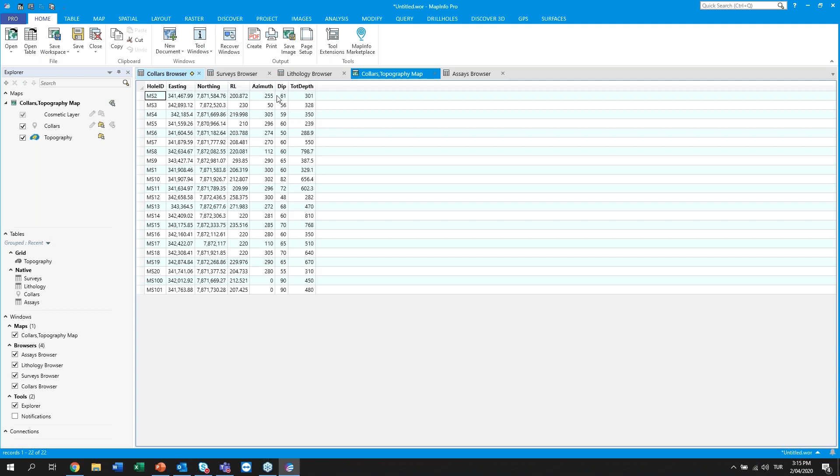I have assay, collar, lithology, and survey, and also topography. I'm gonna open up those. Let's start with the collar. As you can see, I have a table actually prepared for the collar data. You can see that we have a hole ID, names of the drill holes, easting and northing for the coordinates, and also RL refers to the elevation. And also we have azimuth and dip values and the total depth.

For the survey file, we have hole ID again to match our database. Depth values. In some cases, you can face with the at, as it can be written as at, and also azimuth and dip measurements. For the lithology file, we have from-to values. We have intervals and also geological units. And in the assay file, we have again intervals and also the grade values coming from the laboratory analysis.

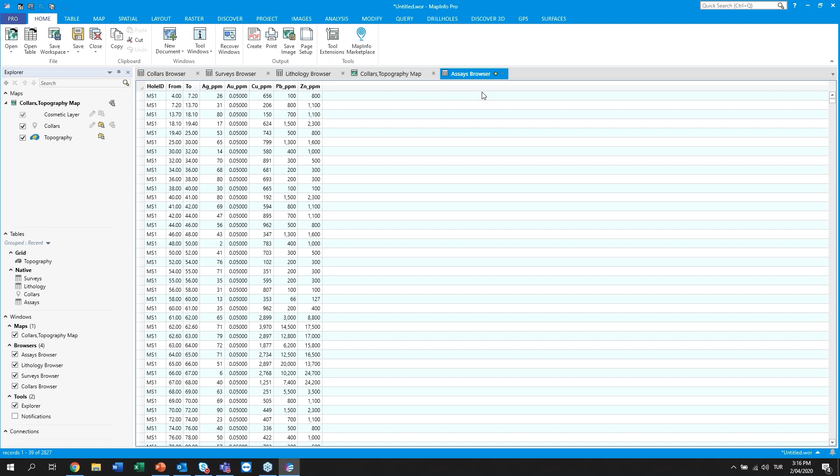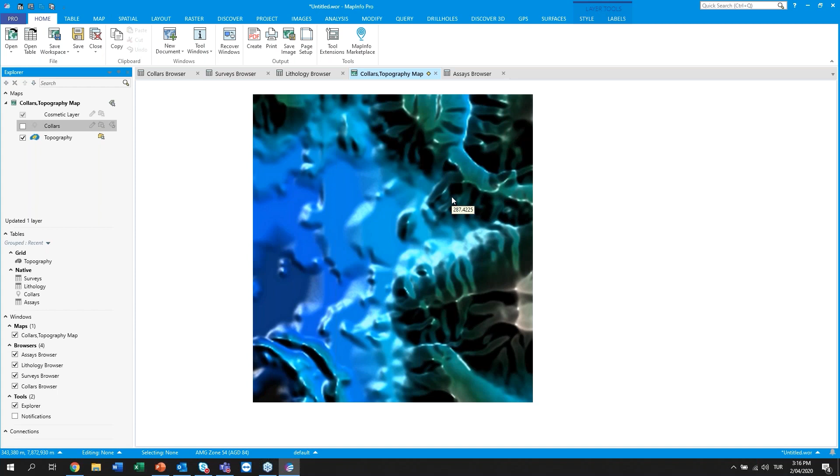Let me close the visibility of collar points. I have the topography. As I mentioned before, we're gonna work on the 2D Discover for this webinar. But if you are working with a 3D tool, it can be visualized as a 3D feature. I'm gonna open up also section lines. If you have section lines similar to this one, you can directly use them. Otherwise, the software will let you produce new section lines if you don't have them at this stage.

Let's come to the drill holes menu. You can find the whole tools, whole commands related with the drill holes. Open, import, create new drill hole project, and also validation commands, legends, sections. You can find all tools related with the drill holes under the drill holes menu. If you have previously created projects for your drill holes, you can directly open them, or you can import previously created projects. Now we're gonna create a new project.

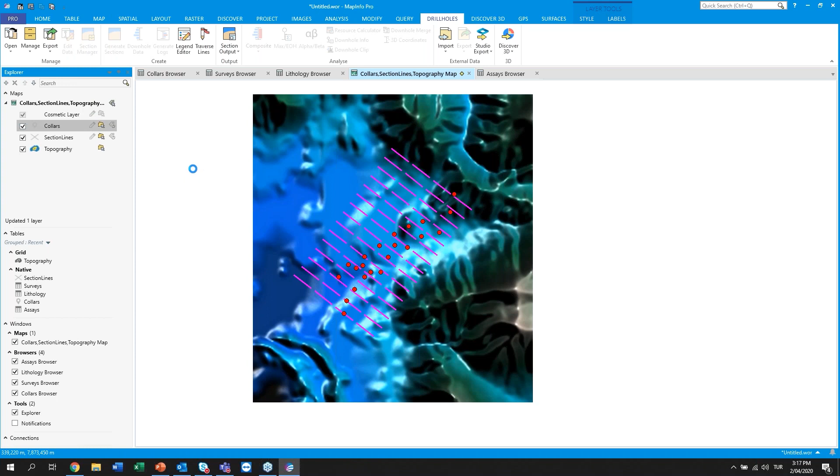I click on the new project button. Drillhole project setup wizard will be open. Now we should give a name for our project. Let's say webinar underscore drill holes. You can give a description to easily track your studies. And also we should define the file path to save this drillhole project. My measurements, depth values or length values, are all in metric values. So I should select the meter.

And also for the project type, we have three alternatives. First one is the project will contain only drill holes, or the project can contain only trench data. The last option is project contains drill holes and/or trench. So we can create a project that includes the combination of both drill holes and trench. Now I only have the drill hole values, so my project will only contain the drill hole data.

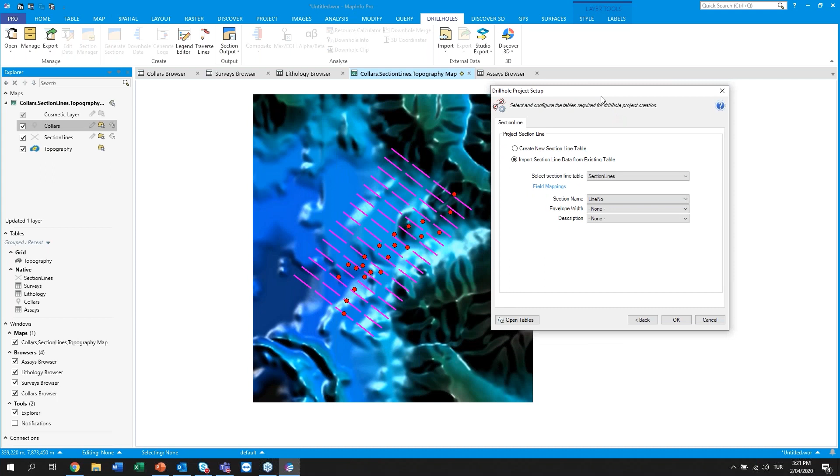Let's continue. I have a topography surface. I select my topography file. If you have any other file for the surface drape or the contour files, you can add them into the project. Let's continue. At this point, if you don't have any section line, you can create a new section line table, or here, as you can see in the pink color, I have section lines. I have a section line table, so I will import them. When I click OK, the software will automatically create our drillhole project according to the input files, the collar, survey, lithology, and assay files.

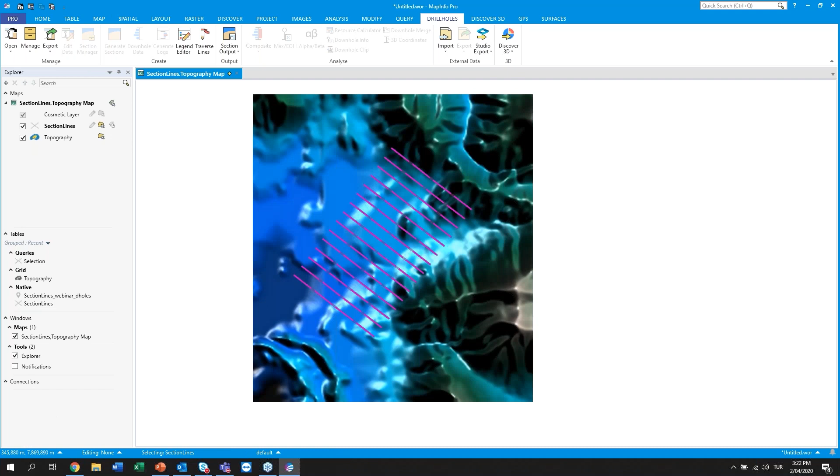Now, as you can see, Discover created a new map window called webinar_dholes, which is the same name I have given to the project name.

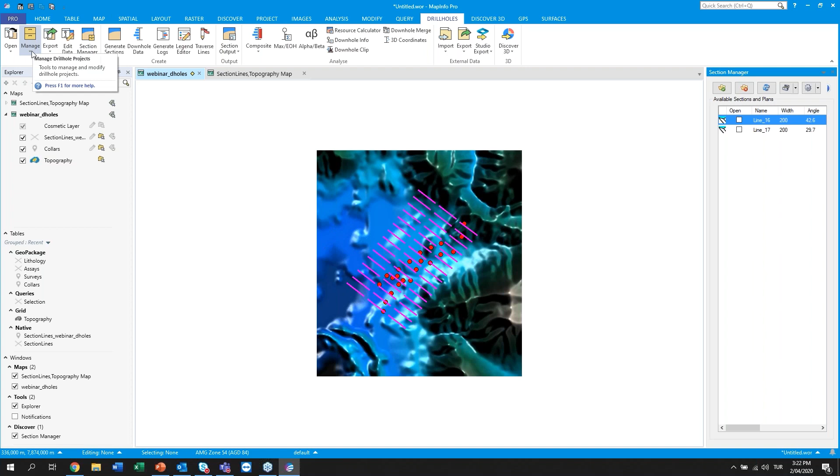And before going forward, let's validate our data. From Manage, you can select Validate. It detects the collars, surveys, assays, and lithology files, and validation will be done for those files. Click OK. Now, some are default validation parameters, but you can add some more. It depends on your project's specifications.

When I click next, collar, as you can see, passed. For the survey, let's also check the collar mismatch. We have two errors, two possible errors. Definitions are no survey records for both of them. So for MS100 and MS101, I don't have any survey records. I should check them. I mean, if I was working for a mining company, I should check them. But in this case, I will assume that those two are not inclined drill holes.

And also, let's have a look at the downhole data. As you know, I have two downhole tables. The first one is assay, and the second one is lithology. At some parts we don't have downhole records for some drill holes. 3 of them don't have assay files, and 2 of them don't have lithology logs. Let's continue as it is, and when I click OK, it will recreate the drill hole project.

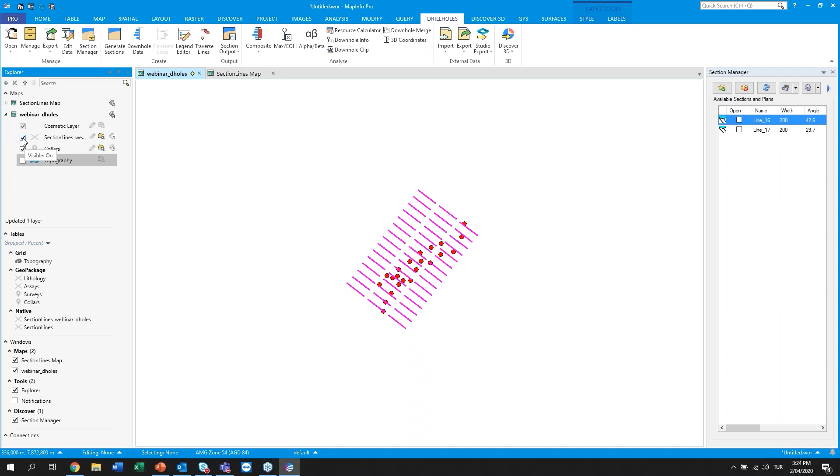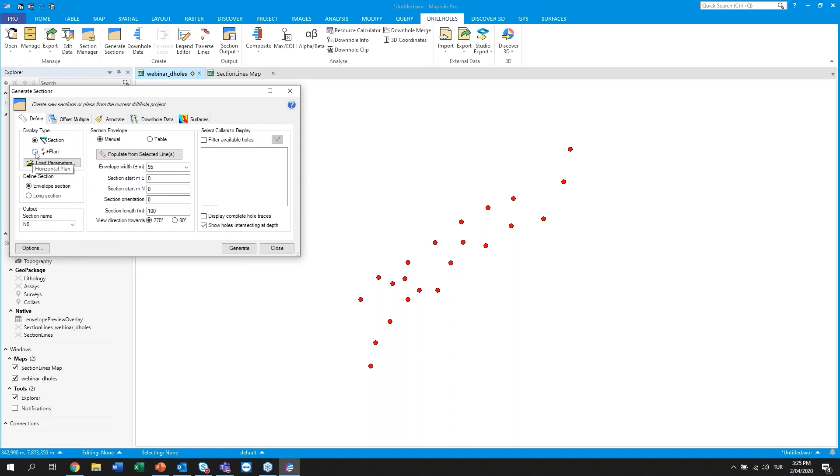Now, let me turn off the visibility of the topography and also, for example, section lines. Yeah, those are my collar points for the drill holes. Let's click on Generate Sections. Firstly, I will start with the plan section. I will create a plan section for my drill hole project. I select the plan, and all my drill holes are selected, as you can see, and I'm just clicking generate. When I click generate, you can see the traces of the drill holes from the plan view.

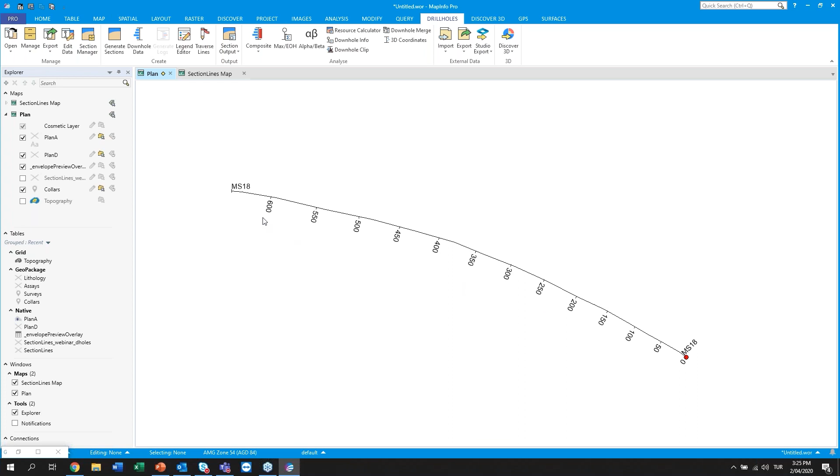Let's zoom in a little bit. For example, MS18, we have the drill hole traces. If you remember, we didn't have survey records for 2 drill holes, MS100 and MS101. They are perpendicular.

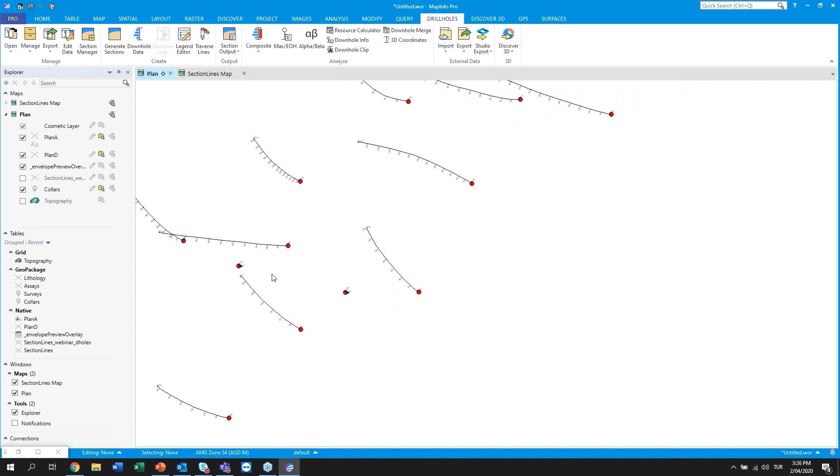Let's create a legend to increase the visibility of our data. I'm clicking downhole data. From this window, you can display your downhole data in different ways. For example, you can add text or line graphs. For the grade values, you can create a line graph to display the gold grades or copper grades, what you have. You can add bar graphs or trace shade. I'm going to use trace shade for this example.

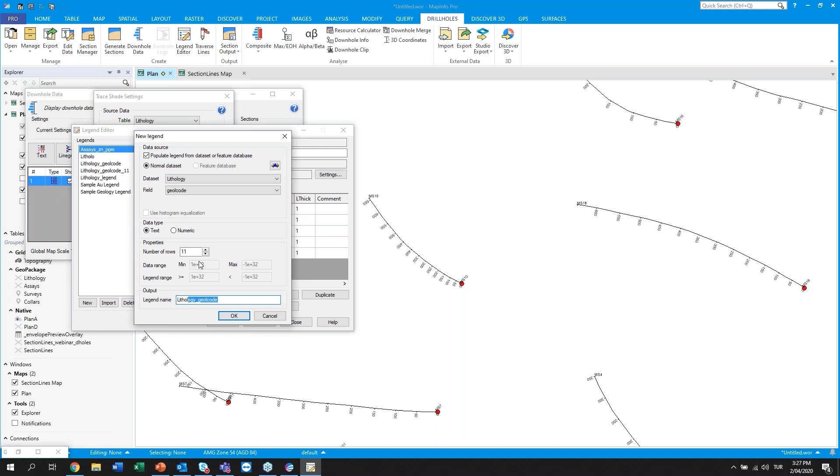I have assays and lithology, but now I will create a legend for the lithologic units. I selected lithology for the table, and my lithologic units were categorized under the geocode field. If you have previously created legends, you can directly select one of them, or you can create or import another legend. When you select new and enable this one, because I have a database to create my legend, my dataset will be lithology, my field will be geocode, similar to the previous step. Let's define a name, lithoweb.

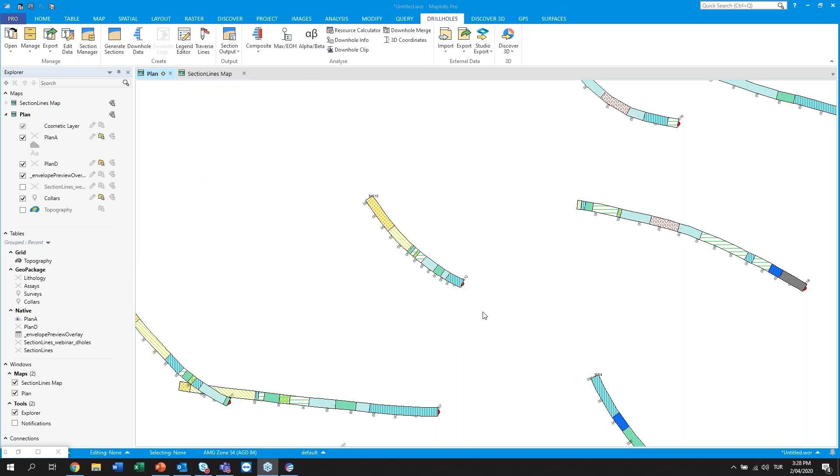All geological units in the lithology file will be listed here, and you can change their color, line thickness, or patterns. You can give a separate texture for each unit, and different thickness values for each unit. I have a previously created legend here. It will be easier to use and to analyze my data. I'm going to use this one. I'm selecting my legend and select OK, and it should be applied to the plan section. Then just click apply. When you click apply, our drill holes will be displayed according to the created legend.

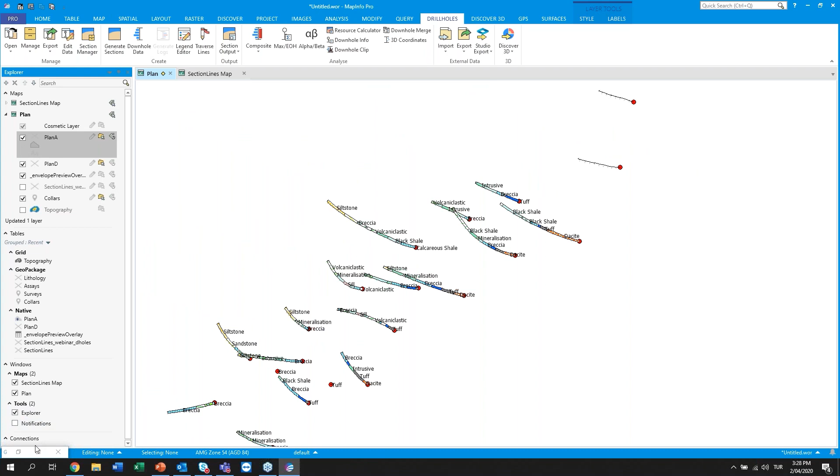You can also turn on the automatic label. Now let's continue with the sections, the drill hole sections. I'm closing this one, and I will open up my sections.

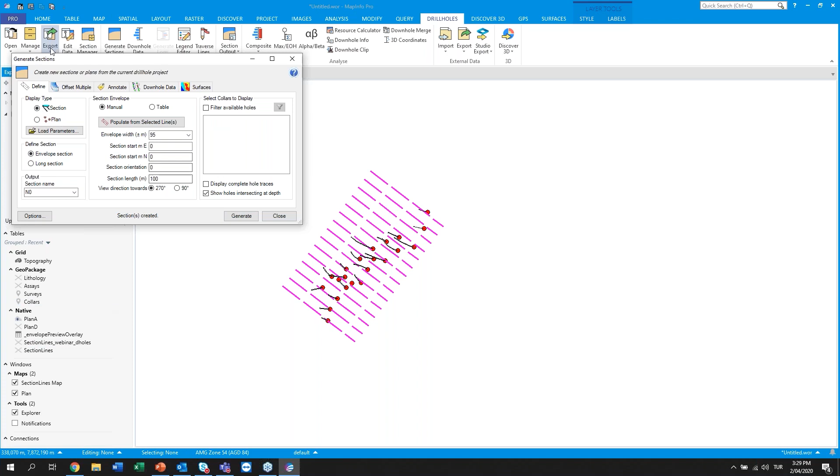Again, I came to the generate sections, but this time I will be focusing on the sections. For the sections, I should select my section lines. I came to the section lines, right click on it and select all. All section lines will be selected now, and you can define that. For example, envelope width will be 50 meters.

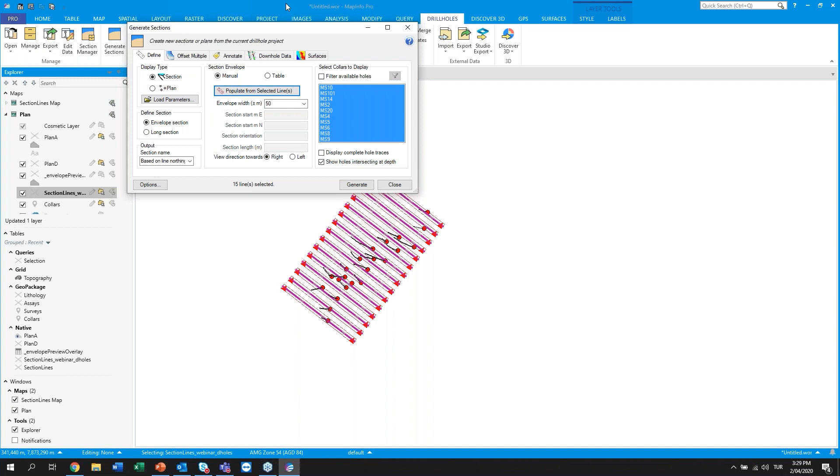When you click populate from selected lines, you can see that here within the red rectangles, I have section envelopes. But at some points, for example, at this point, some parts of my drill holes are not within any envelope. So I should increase the envelope width a little bit more.

I select my section lines and let's define 70, a little bit more, 95 will be great for me. Okay. When I increase the section envelope width, you can see that the number of selected holes is increasing because all envelopes are covering all the drill holes.

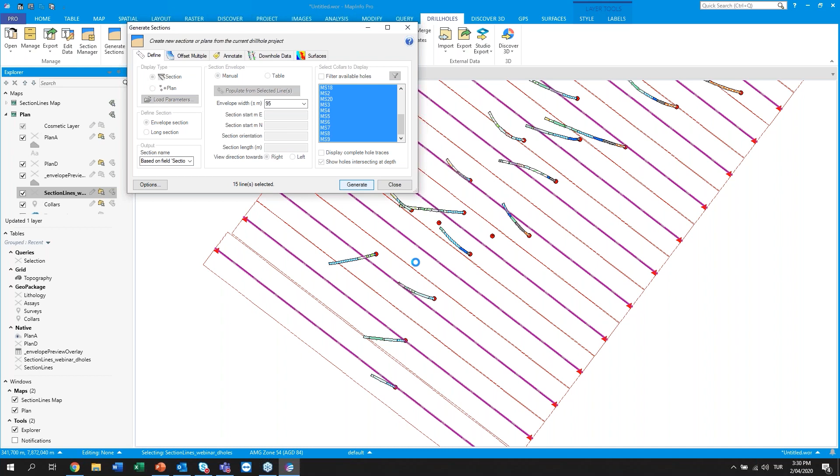Let's define a section name. For example, those will be called as line 1, 2, or something like that. And let's select generate. We're gonna have 15 envelopes, 15 sections, and for each of them, the software will create different map windows. Yeah, great. Now let's have a look at the first one.

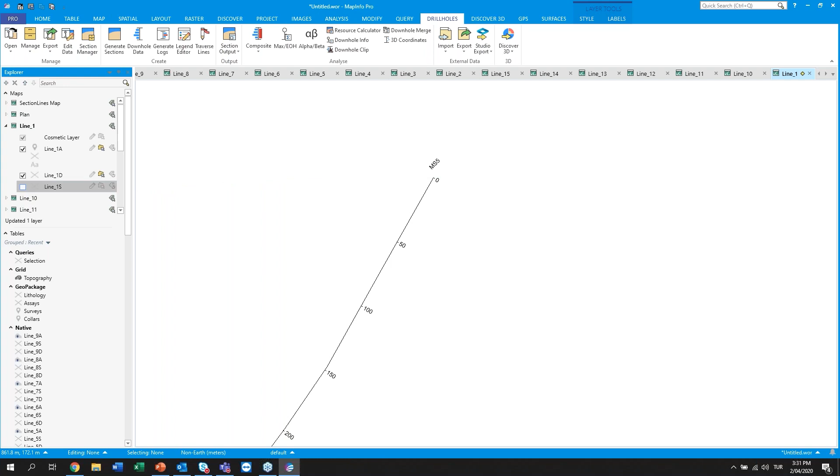For the first one, I have MS5 drill hole. I have some layers under the map window. Line underscore 1A refers to the labels, drill hole name, and also the meters along the drill hole. 1D is the trace of my drill hole, and 1S is the topographic surface.

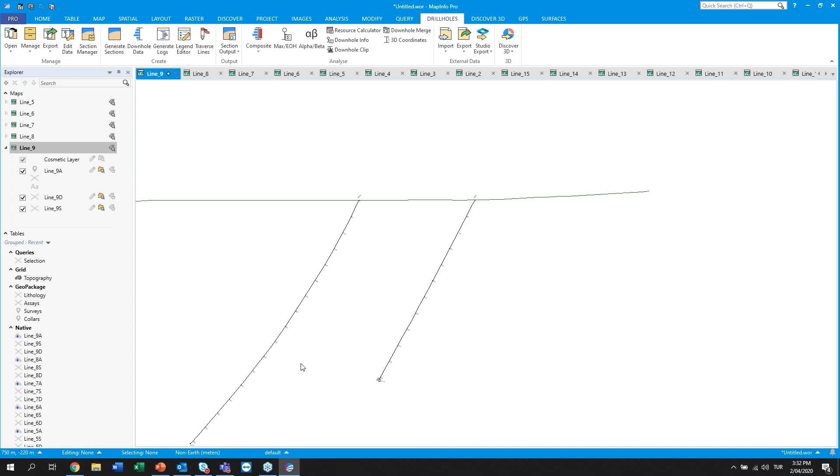We can check some others. We have two drill holes, MS14 and MS8. As you can understand, MS8 ends up within this section, but some part of the MS14 is staying in another envelope. So defining envelope width is very important to not miss out any part of your drill holes, any part of your data. It's very important.

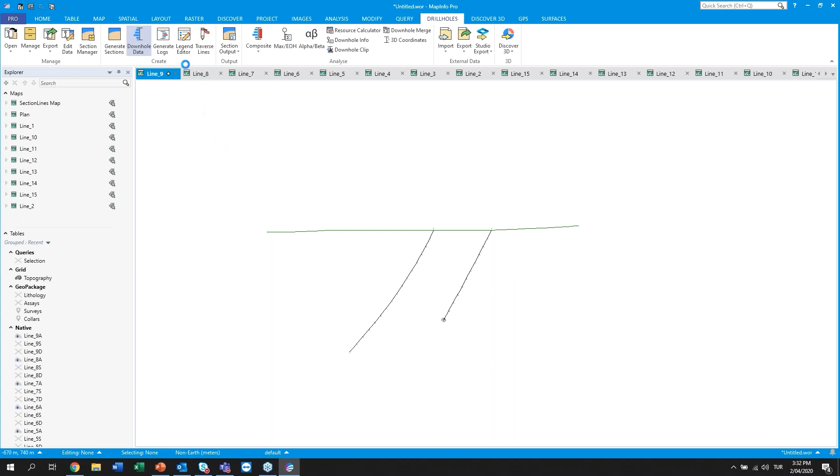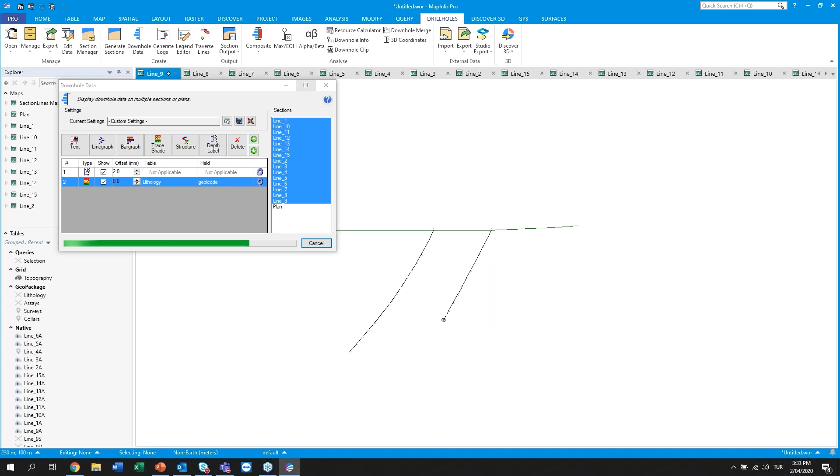From Downhole Data, let's again do the same thing. I have done the legend process for the plan section, but those drill hole sections don't have any legend. Again, I'm gonna use the lithology code, the same legend, for my line sections. When I check them, my legend has been applied to drill holes within these sections.

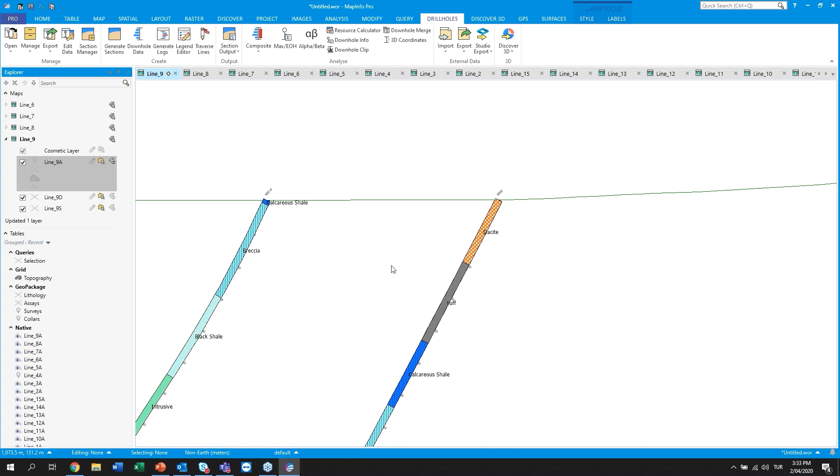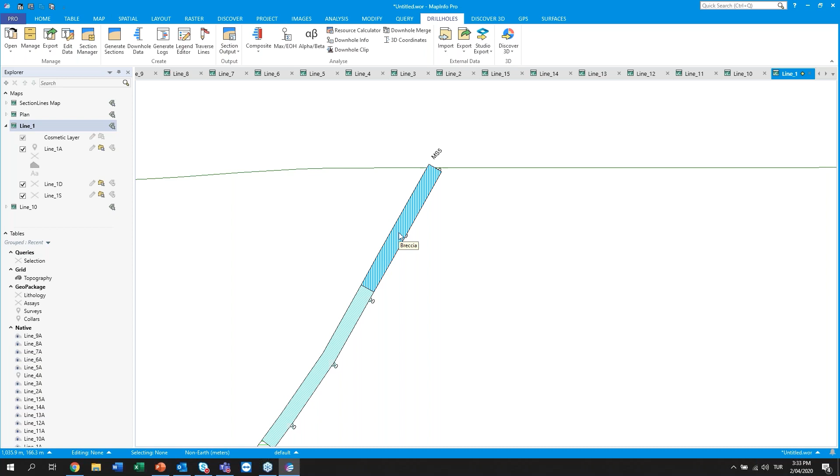And also, as a previous part of the explicit modeling, we can create some polygons to define the extension of the units. To do that, I need a layer within those sections. I open up the section manager, and I would like to create another layer within this section.

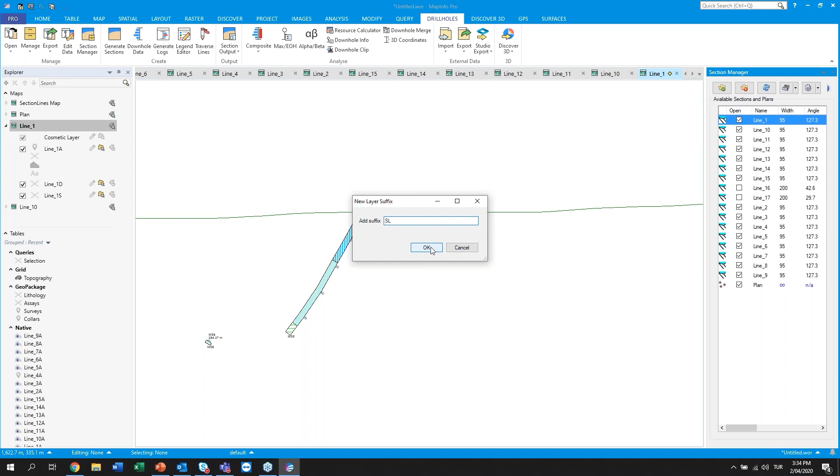I say add section, and let's give a suffix. Now we have a new layer within the section line 1. It's called line underscore 1 SL. Let's make it editable, and also let's insert the polygon.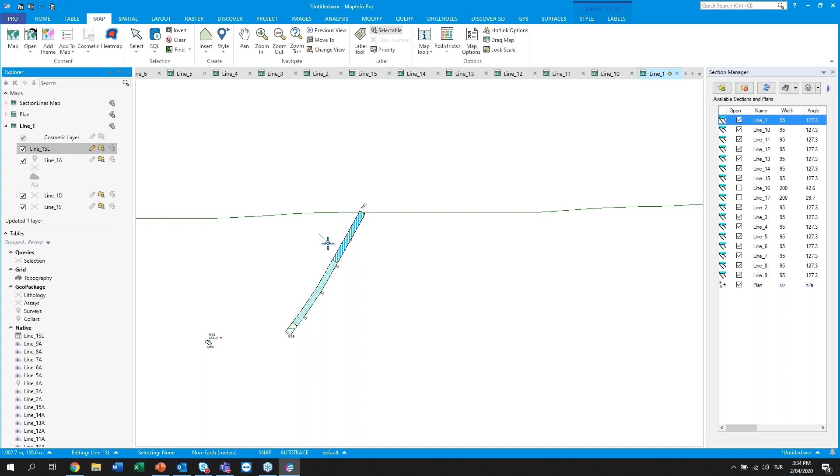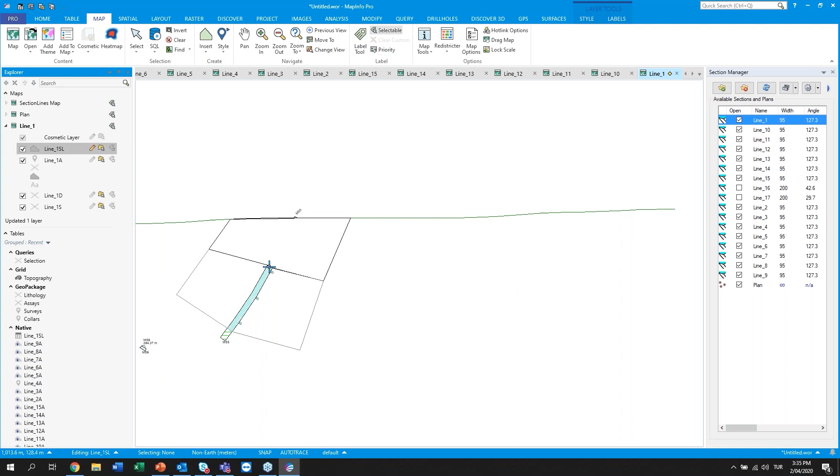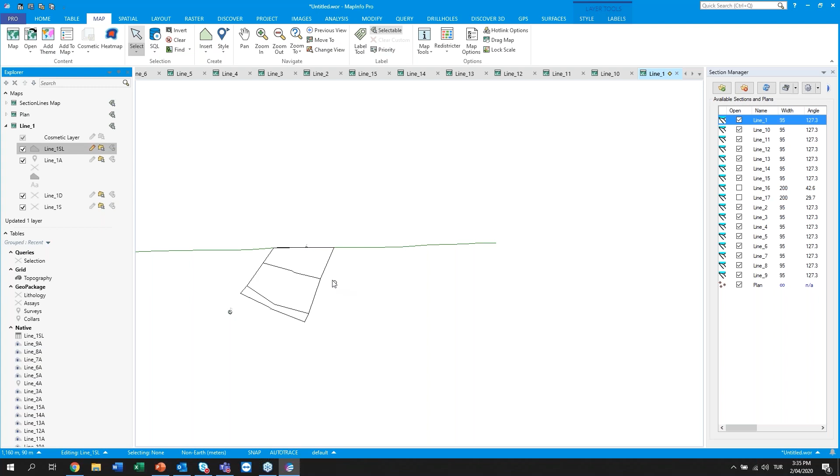You can define the extension area, and also you can use snap and auto trace. Snap will automatically detect the points to snap to the previous locations, and when you are using the auto trace feature, it will automatically detect the previous path and follow it. And also let's define the last one. Yeah, now I have 3 different polygons for 3 different units.

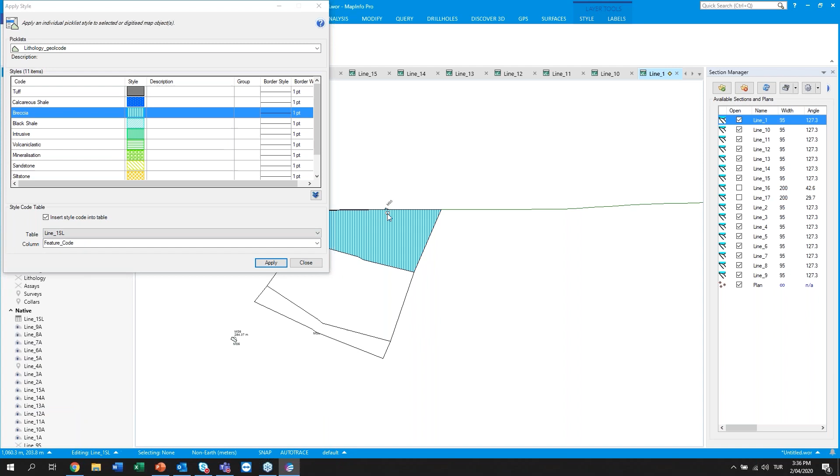I can add the styles to make them similar to the drill holes. I'm gonna select the same legend from here. The first unit is breccia. Select breccia, and from this part as well, it should be saved on this table. When you click on apply, it will be the same as the drill holes legend. Let me show you. Your units also will be the same as your drill hole data.

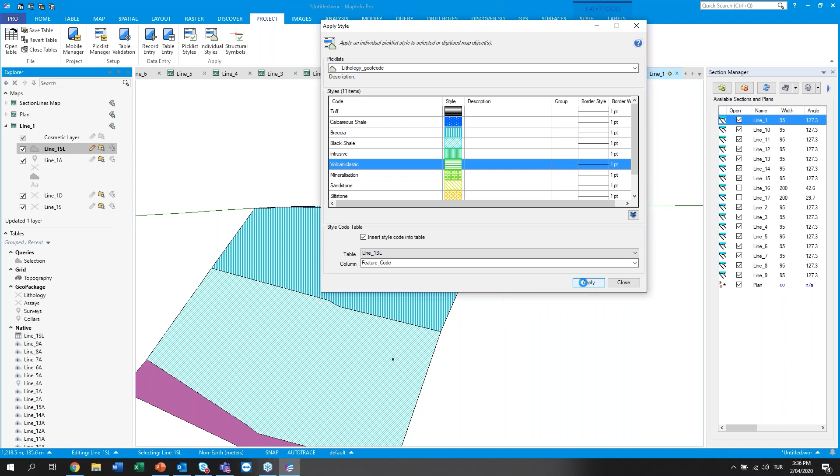Let's do the same thing for the black shale. Let's apply, and also I have a volcaniclastic unit. Let's do the same thing. You can do the same process for all of the sections, all of the drill holes. You can combine different drill holes within the same section, and you can create almost a solid.